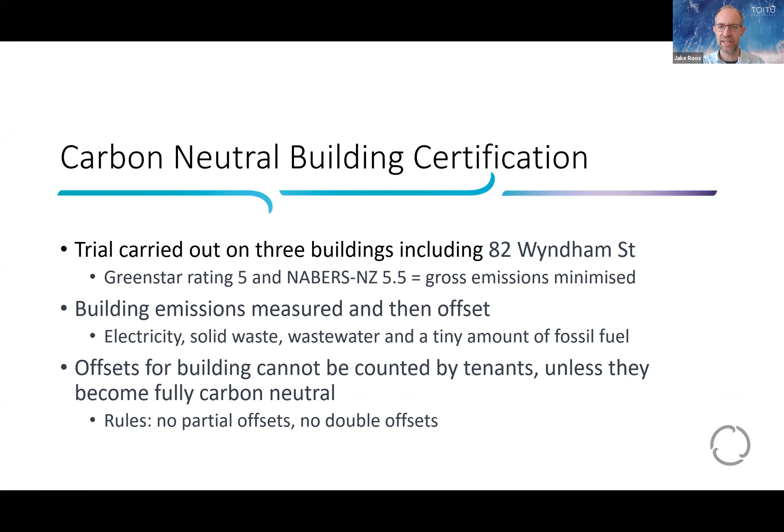So now I'm going to hand over to Argosy Property Limited. We have two guests, Satish Bana, Head of Sustainability at Argosy, and also Nathan Herbert, who is one of their chief engineers. And they've got the in-depth knowledge of energy conservation measures employed in that building. So over to you.

Hi, I'm going to start on 82 Wyndham Street, just giving you the overview of the case study for this building. Now, Argosy has been quite open about the fact that we only do built ratings rather than design ratings. So what we actually build is what we actually certify and rate. In this case, this building was a 20-year-old developed quality building. It had short lease tenure in it.

And what we decided to do was, instead of demolishing, we decided to refurbish the existing building and go right back to the concrete structure and replace all the services. We gave it a seismic upgrade at the same time, and we also introduced an end of trip facility as well as increasing the amenities in the building in regard to making it comply to current building code for accessible access and

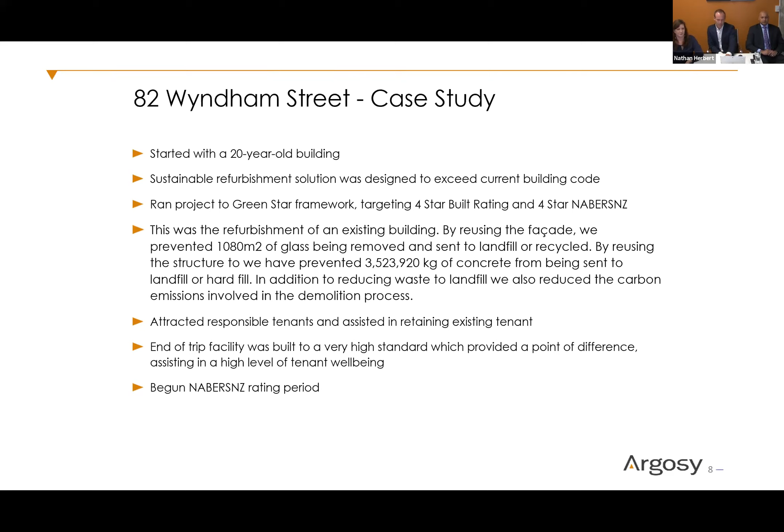You need sub-metering on all of the floors, all of the mechanical plant and common area, so you can separate those. Base build NABERS rating, which we were going for, rates common area, lighting and power, and base build mechanical, which is the main air conditioning plant of the building, the lifts, and any other major electricity draws there, and it excludes any tenant consumption, which goes on a NABERS-NZ tenant rating. So the only way to do that is that sub-metering.

We went a bit further with our sub-utility metering and actually installed 64 sub-utility meters for a 4 or 5 tenant building, which has allowed us to really drill down on the areas where we might be able to tweak our efficiency, have a better picture of how we're using energy, and basically plan to trim it from there, which we did.

And after our 12-month rating period, we achieved a 5-star NABERS-NZ base build rating, which we're very proud of. And since then, our most recent NABERS rating has been 5.5 stars, which we're very happy about. To be able to achieve that on a 20-year-old building is something quite special.

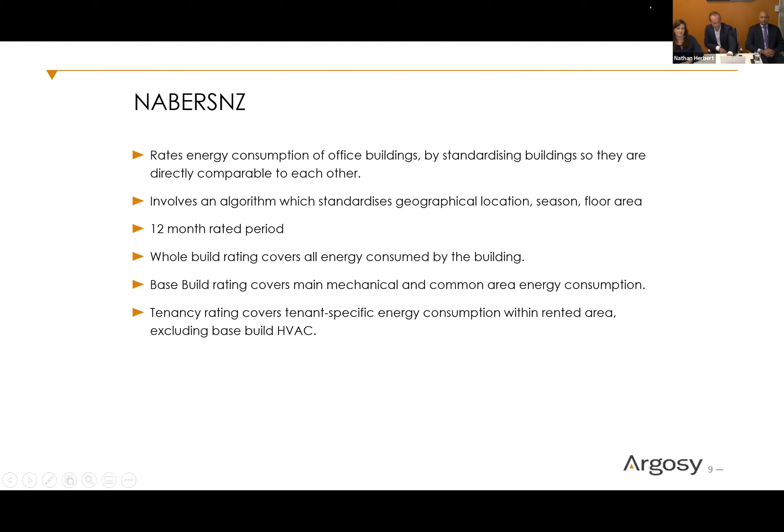So part of going for this, it wasn't just Argosy that designed this system. We had a team that worked with us through this project, and I think Satish might be able to speak a bit on that. Yeah, so what we did was we had a really involved client as well, Boffa Miskell and Panuku, and having your clients and the occupants on board in the process does improve the outcomes. And Boffa Miskell were really big on wanting some environmental credentials on this building, as well for Panuku. So that allowed us to really push our rating.

So what we did was we designed the building, we ran the rating system over it. We didn't go and cherry pick a rating system and then try and get a rating. What we did was we ran the project as we wanted it, which was really focused around a long-term approach to the building, because we're an investment company. And also it's about having the right product for our clients and providing what we told them we would provide. So we actually do go a bit beyond the developer mentality, because we are taking a long-term approach.

The original project goals for energy reduction were only around the 10-15% mark, and we actually increased this with our existing clients to 20%. And like we said, we targeted the 4 and 4 and ended up with 5 and 5, and then now we're 5 and 5.5. When this building, after year 1, it was the only building in New Zealand to have a 5-star Green Star rating, as well as 5-star NABERS base build rating.

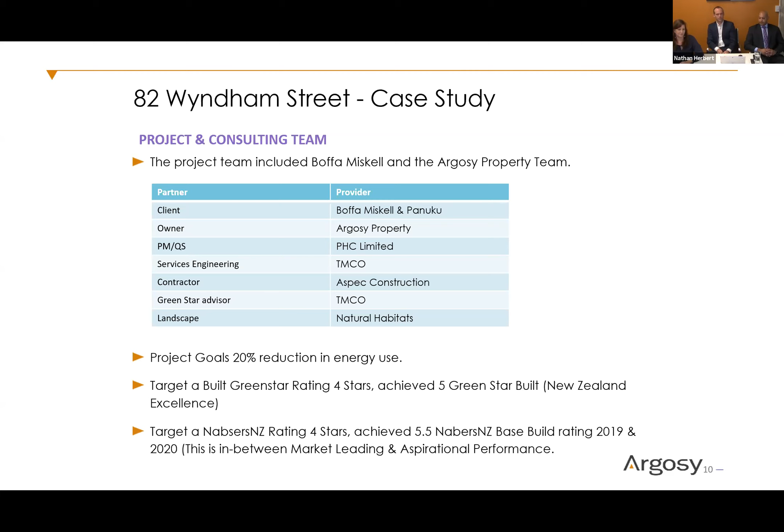Going on to the next slide, that there is our case study of why we did it, and there's actually a monetary benefit of doing it, but there's also a social and environmental responsibility there. And one of the things we've said at Argosy is we lead environmentally from the top down in our organisation. So we started it from the CEO down to the senior leadership team, and then the guys in the property management team pick it up as well. So sustainability is embedded in the organisation.

In here we show you the pre-green benefits. So it was a standard VRV building with T5 lights and just your typical one disabled shower, toilet on each floor, one shower per floor. Then after we finished the project, we've actually got a heat recovery smart VRV ducted system. We increased the fresh air up to 200%. We've got our intelligent LED lighting with daylight occupancy. We've got a large EOT facility, which is the envy of other building users. And that was a very big draw card for Boffa Miskell and Panuku for this building and for Foster Moore.

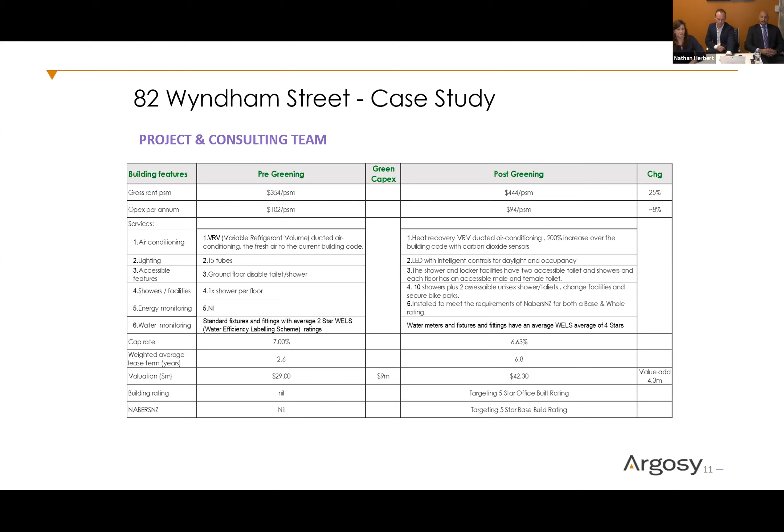And then targeting some independent verification through rating systems like NABERS and Green Star gives the occupants a bit of assurance that we are doing what we said we were doing, and it is independently verified by a third party. But you'll see in this that we had a large valuation uplift as well for the project. So not only is it sustainable, but it makes financial sense. Next slide, please.

This basically reflects what we've just been talking about in a nice colourful picture. The first section, you can see the electricity consumption of the 4 floors in the building pre-project, and then there's the consumption post-project. Few things there. In post-project, you can see the downward spike from COVID occupation. But more interestingly, what you can see is a smoother pattern there.

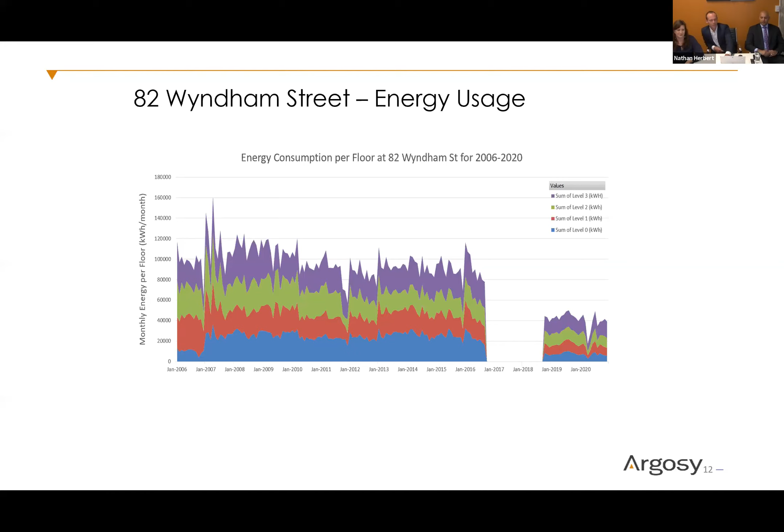The air conditioning doesn't put load on and then take it right off. So not only is this a more efficient system consumption-wise, but it's better on our plant and equipment. It lasts longer, lower maintenance costs, all of which result in these great ratings, but I think that's a self-explanatory chart. And we have a couple of slides to show you our interior there. That's the lobby at 82 Wyndham Street.

It went from a 20-year-old dated space to seriously up to the minute, reflected by our end of trip facilities as well. The building was a very rudimentary building originally, and it was very stark and impersonal. Of the time, it was very clean lines, bland. The foyer had 12 shades of grey in it, which looked like a Tetris cube gone wrong. Ignite did a great job in putting a Scandinavian timber theme through the building, which you can see there.

And we've gone to very natural stone, timber, and we've gone for not a green wall, but an organic moss wall, and we've also used an organic plaster render there rather than just a plain paint finish or a tile, just to soften up the area. This theme goes through the whole building, and it goes through our end of trip as well. In line with the Green Star built rating, all of the paint finishes in the building are low VOC, and timbers stamped from sustainable sources. Okay, next slide.

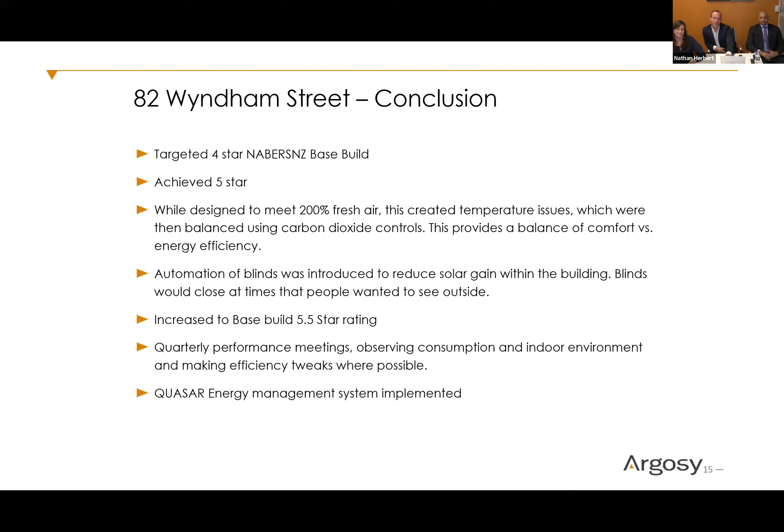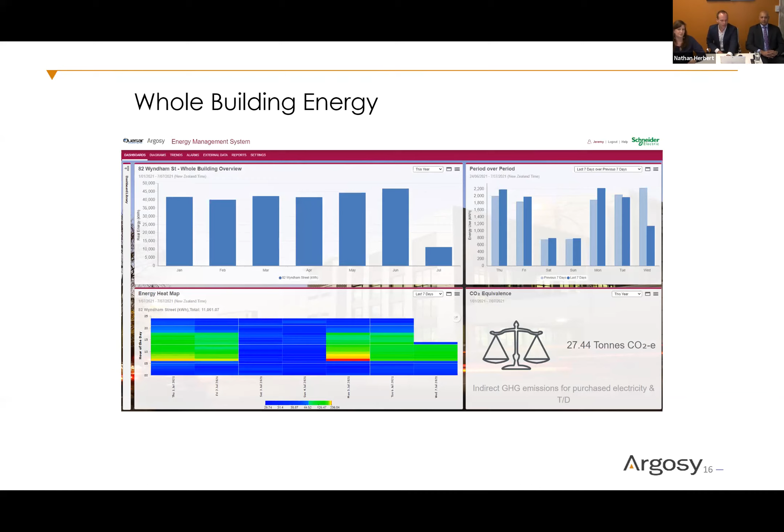In order to follow and track our energy consumption, while we do have specialist building services consultants who conduct the NABERS rating for us, here at Argosy we use an energy metering system called QUASAR, and the way we've designed it for the building is a dashboard showing whole building energy. The next slide shows base build energy, and then the next slide, tenancy energy. Now on the bottom left, you can see what we call the heat map.

While there's red for tenant, for example, the great thing about that is that it shows the load is constant through the day, which reflects the smooth line on the graph shown earlier, meaning there's no unnatural loads on the equipment, which is going to cause failures. There's no particularly high demand on it. That's great for efficiency and for longevity. We really like this dashboard system. It's a quick peek, a lot of people can understand it, and it allows us to tailor exactly what sort of visuals we would like for this.

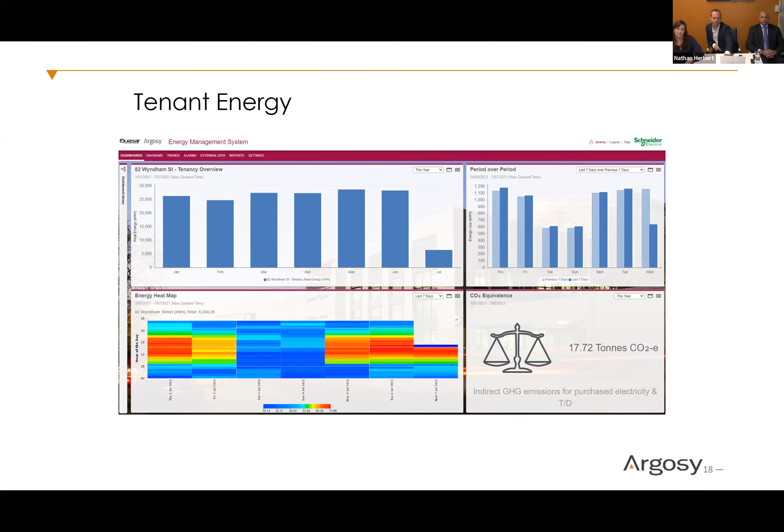Yeah. Thank you. Great. Thank you, Satish and Nathan.

Now I'm going to hand over to Danielle Kennedy, who is Principal Advisor Corporate Responsibility at Eke Panuku Development Auckland. Danielle provides guidance on sustainability and climate change across Eke Panuku, town and centre and urban regeneration portfolio, and design and project management functions. So over to you, Danielle. I'll just say next slide when you want it.